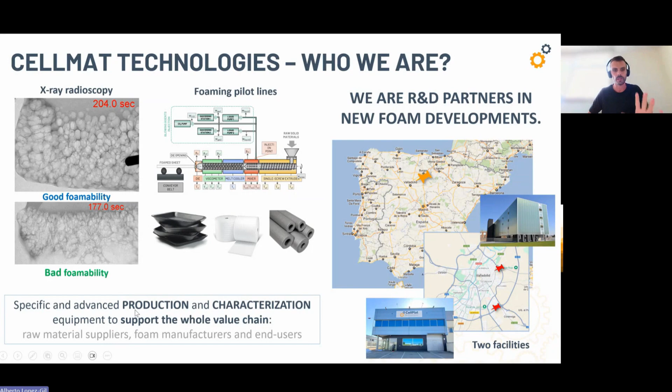What we do is basically support companies in the foam market to develop more sustainable products and more advanced products. We help companies in the whole value chain: raw material suppliers, foam manufacturers, and end users of the foams. And why foams? On the one hand, because they are very interesting materials from a scientific perspective, as you can see here in this X-ray tomography reconstruction of the cellular structure. This is also equipment we have to understand the cellular structure of foams.

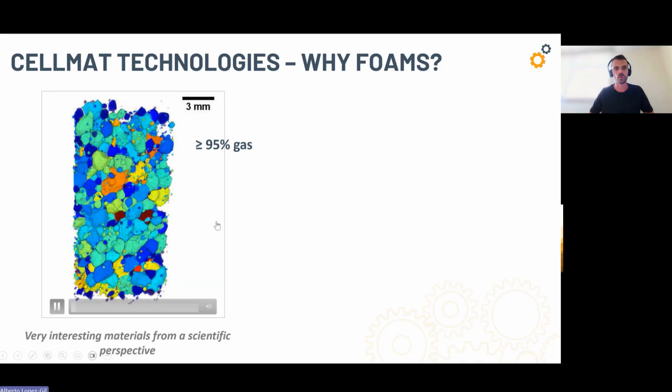Foams are very complex materials. They are two-phase materials: there is a polymer and there is a gas. In low-density foams, which are most of the foams in the market, more than 95% of the material is gas, and the gas phase is arranged into a very complex cellular structure, which is not easy to analyze. We have tools to analyze this with accuracy, and this is important for the physical properties of the foams.

On the other hand, they are strategic materials in many sectors and applications, depending on the structure. If it is a closed cellular structure, we can use them in buildings for thermal insulation, for instance, in packaging, in food packaging, in sport products. For instance, the soles of running shoes are foams, as you can imagine. And if the cellular structure is open, interconnected, as in this example, they can be used as acoustic insulators, in comfort applications, mattresses, and car seats. The range of applications broadens when the cellular structure is open.

The foam market is huge. It is a rough number, but around 10% of the world plastic production is dedicated to the production of foams. If we consider the volume, given the density of these products, this represents 50% of the whole plastic market in volume.

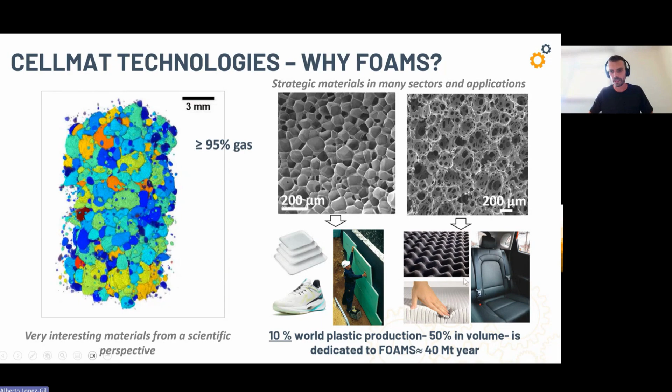However, these products, in many cases, are not circular, or they represent at least environmental challenges. Many of them are common to any plastic product. Most of the foams in the market are produced from fossil-based polymer, for instance, polystyrene foams, polyurethane foams. This is clear. Secondly, the recycling of these materials is not easy in many cases because of the high gas content. It's not easy to get rid of the gas for recycling.

In addition, most foams are cross-linked. They need to be cross-linked to achieve low density. So in the end, they are thermosets, difficult to recycle. The volume is very high, as I said before. So they occupy large spaces in landfills when they are finally discarded. This is an example of what you can see in this picture.

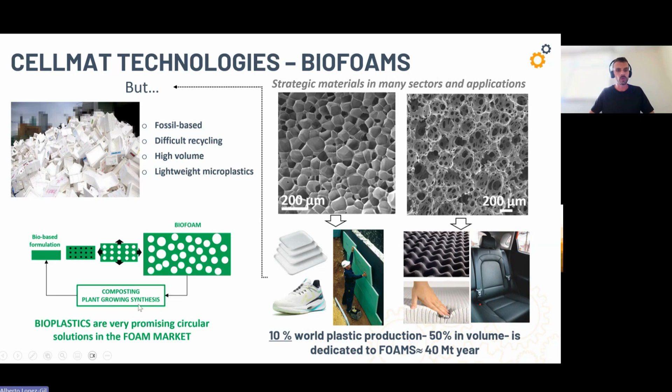And concretely, associated to expanded polystyrene, for instance, they release lightweight microplastics that can be accidentally dispersed in the environment. And this is also a huge concern, specifically linked to foams. This is why we believe in CELLMAT and, in general terms, that bioplastics are very promising circular solutions in the foam market. However, there are some drawbacks that are avoiding so far the penetration in the foam market of biopolymer

and bio-based formulations. Here you can see some of them: moisture sensitive. They are moisture sensitive, and this is not possible in certain products. The thermal resistance is lower. The performance at the same foam density is usually lower with some biopolymers. And in general terms, they need modification to improve foamability. And this is because there are not yet many grades specifically developed for foaming. And foaming a polymer needs to withstand very stringent requirements.

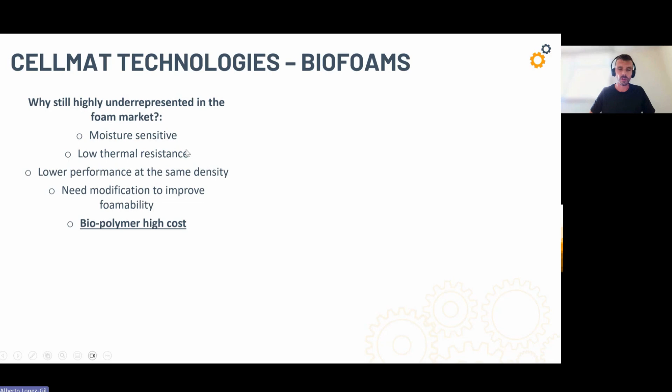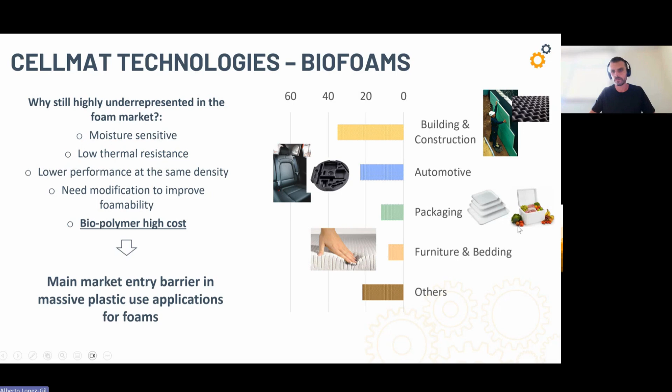But finally, and this is common to most applications of foams, the cost of the biopolymer is very high, and the foam market is dominated by commodity polymers, as I said before, by polystyrene, for instance. And this is so far the main market entry barrier in massive plastic use applications for foams. Here you can see how the foam market is divided by sectors. Most foams are used in the building sector, as I said before, for thermal insulation, acoustic insulation, automotive, expanded polypropylene, polyurethane foams, packaging, mainly dominated by polystyrene foams, but also furniture and bedding.

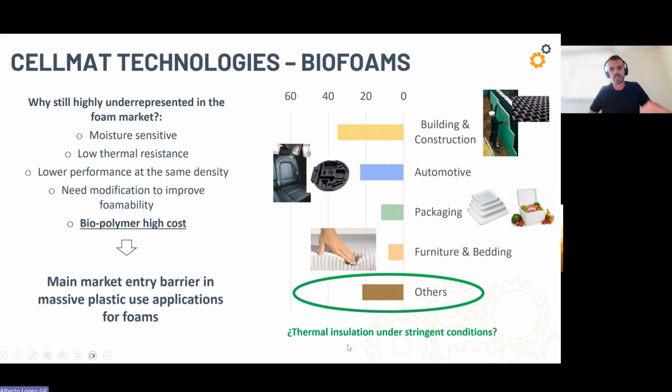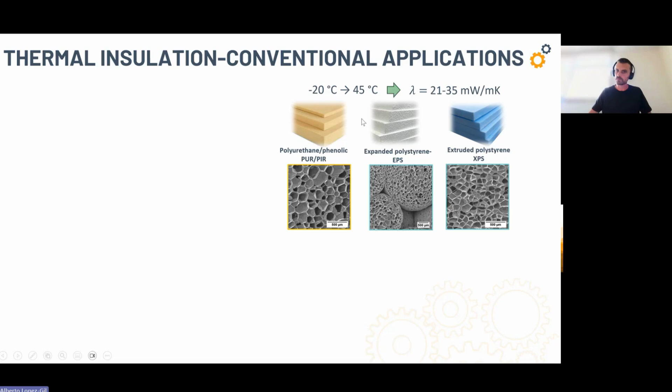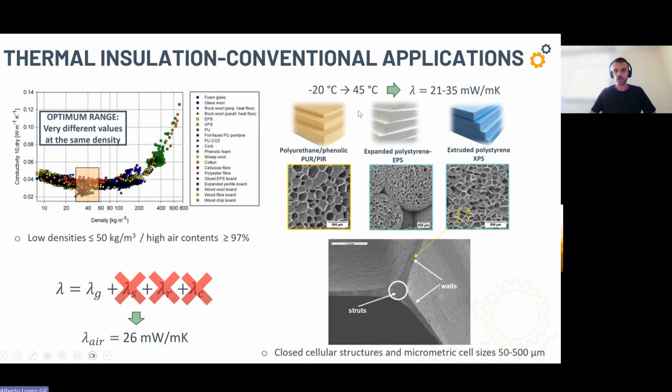And moreover, these materials are designed to be closed cell and to have cell sizes within this range, 50, 500 microns. And by doing this, we can also suppress the radiation term and the convective term. So in the end, we have basically the thermal conductivity of the gas, which in this case is air. We have foams that are very good for thermal insulation under normal or conventional climate conditions, I would say. However, there are some applications for thermal insulation in which the conditions are more stringent, and this is the case of the refrigerated transport of vaccines.

So these are very stringent conditions for the thermal insulation material. And moreover, the transportation time is very long. We need to keep the product at very low temperatures during the whole process of transportation until the health care facility. And finally, this is also important, the space for thermal insulation in these packages where the vaccines are stored during transportation is quite limited. We are talking about very low thicknesses to put our thermal insulation material inside.

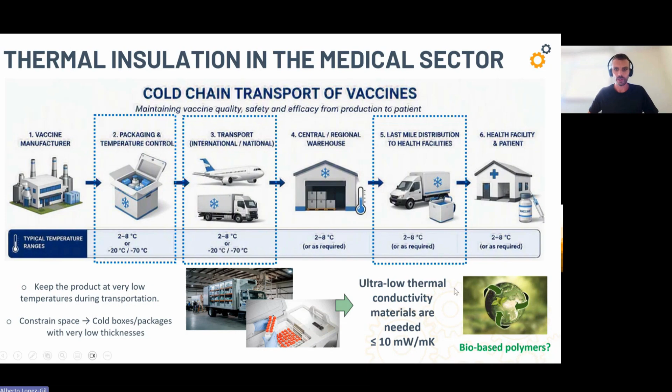And this is not the case in other applications for thermal insulation where we can play with the thickness to increase the thermal resistance. So it's clear that in this application concretely, and in general in the transportation of refrigerated products, generally vaccines, remedies, we need ultra-low thermal conductivity materials, allowing us to have lambdas below 10 milliwatts per meter Kelvin. So we believe in this case, the cost is not such a high requirement for the polymer or for the foam. So maybe this is an opportunity for bio-based polymers.

So what super insulating material can we use in this application? There are some possibilities in the state of the art. One of them is aerogels. We all know them. They are the lightest materials in the world and the materials with the lowest thermal conductivities, but they still face some issues. However, there is another material, the vacuum insulation panel, which is already being used and is already industrially produced for this application in which we need very low thermal conductivities.

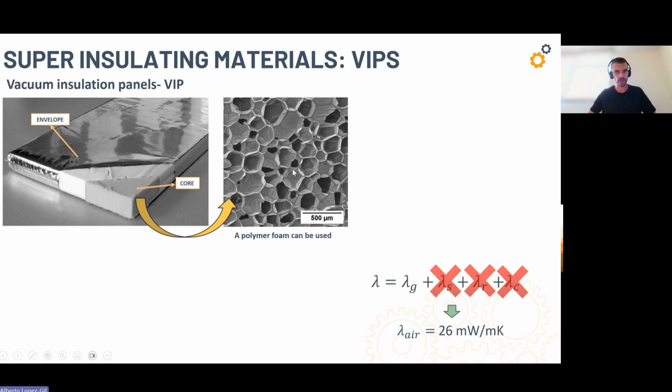This is in essence a vacuum insulation panel. It's a sandwich material in which we have a core and an aluminum layer on top. So in essence, we have a sandwich structure. And as a core of the vacuum insulation panel, we can have nanometric silica particles, which are compacted. This is a typical product in the core of the vacuum insulation panel, but we can also have a foam, which in this case is not a closed cell foam, as we said before for conventional thermal insulation application. This is an open cell foam because we need to evacuate the air, the gas inside the foam using vacuum.

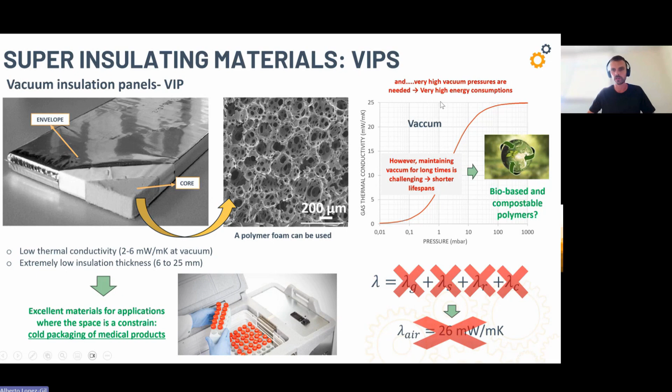With conventional foams with these cell sizes, the energy consumption in the production of the vacuum insulation panel is very high, so the final product cost is also very high. How can we reduce the vacuum needed to remove the air inside the foam? One of the best strategies is to reduce the cell size to the nanoscale.

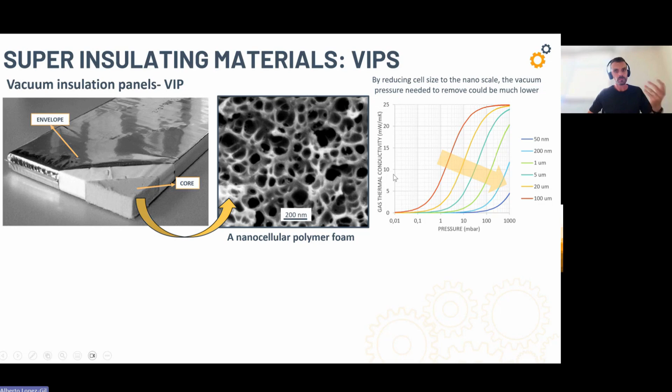By doing this, as you can see here in this graph, where we see the gas thermal conductivity and the vacuum pressure, by reducing the cell size from 100 microns to 50 nanometers, which is this line, we can reduce enormously the vacuum needed. So now the energy required to produce the vacuum insulation panel is lower. And this is something we have already done.

We have been able to produce nanocellular polymer foams that are very promising for this application. The cell size is below 200 nanometers. So what you see is like a solid panel, and you don't perceive this material as a foam. But if you look at the micrograph, at the microstructure inside, you see that this is a foam.

This is a technology that we have developed. The thing is that we need very specific technology. We need supercritical foaming using very high pressure, long foaming times, and polymers specifically developed to uptake large amounts of carbon dioxide, such as PMMA. So the question is, is this possible? Can we produce this nanocellular foam, with open cellular structure, by using low pressures and foaming times?

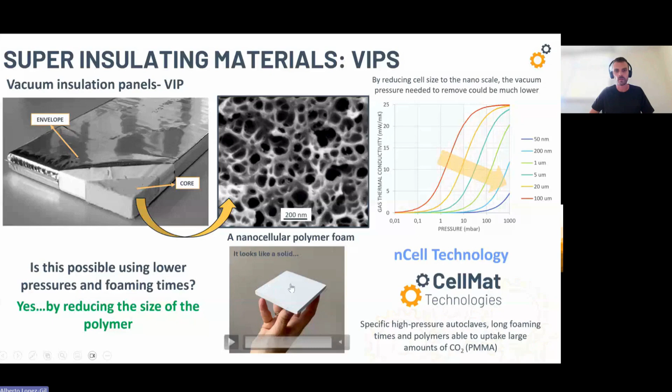Yes, this is possible by reducing the size of the initial polymer we want to foam. And this is possible by using the bead foaming technology. This is a technology in which, instead of foaming solid sheets, large in size, with a prismatic shape, for instance, we are foaming tiny micropellets, lower than 1 millimeter in size. This is the initial polymer. This is the vessel, which in this case is a stirred vessel.

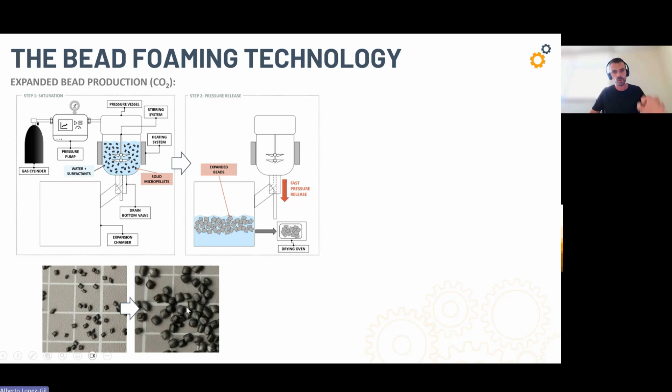So the micropellets are suspended in water, and then the blowing agent, carbon dioxide, is injected, and the gas is diffusing into the micropellets. And when the micropellets are fully saturated with gas, then we open a valve, and the micropellets expand into expanded beads, as you can see here, also very small in size. And finally, we need a thermoforming process to obtain a prototype. This is a very small prototype obtained in our facility.

But this process is already used to produce real products, such as expanded polypropylene, for instance, used in the helmets of bicycles or in many car parts, for instance, in the boot of the cars. And we have a wide range of autoclaves, of high pressure vessels, stirred vessels for the bead foaming technology in our facility, with very different volumes, from 0.3 up to 5 liters.

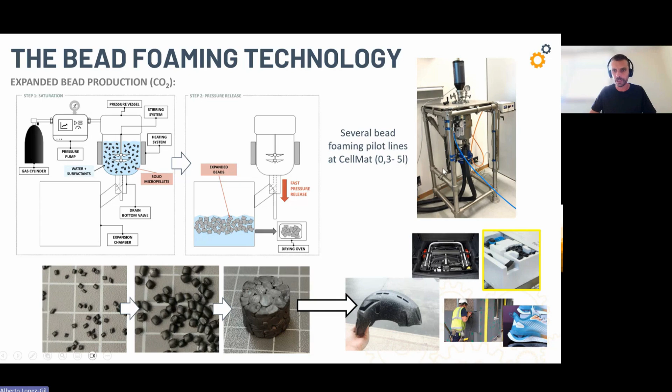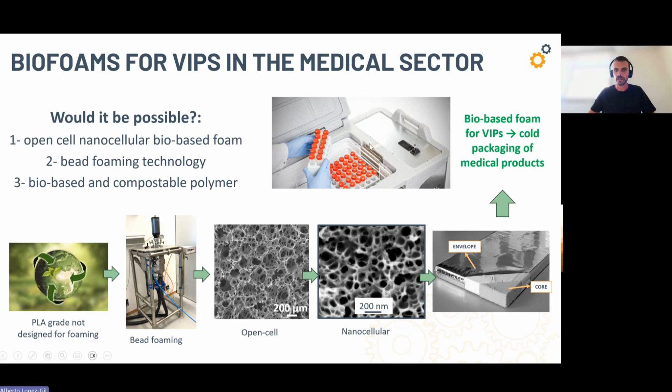The thing is, okay, we now know that we can reduce the time and the pressure to produce a foam using very tiny micropellets. But is it possible to produce a foam with an open cellular structure and a nanocellular structure, needed in an efficient vacuum insulation panel, using the bead foaming technology and using a biopolymer, in this case a PLA grade not designed for foaming? If we are able to fulfill all these requirements, we would have a very promising material for the core of a vacuum insulation panel, and then a very promising material for the refrigerated transport of vaccines, for instance.

So we needed to come up with several approaches to do this. If we wanted to have an open cellular structure using a conventional PLA grade, we came up with the idea of using bio-based particles, in this case micrometric particles, such as native starch. So this is our foam at high densities yet, and the particles, in this case native starch granules, embedded into the solid polymer. As you can see here, this is an SEM micrograph of the native starch. The size is very small.

If we have these particles in the walls of the foam, when the foam reaches very high expansions, if they are properly placed, maybe at very high expansion we can promote the breaking of the walls. This is the idea. So we have particles that are small initially, so that we don't promote the collapse of the foam. We allow the foam to grow without collapsing.

But then at the end, when the expansion is very high, these particles are able to break the cell walls, which in a very low density foam are very thin. The cell walls in a foam are around 1-2 microns in thickness. And this is what we do. We produce several blends of PLA with several contents of native starch particles.

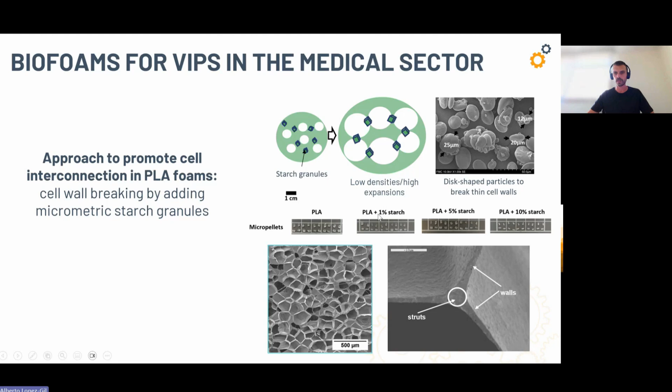As you can see here, these are the micro pellets before the foaming process. And then we also needed to have nanocells in our final foam. So the approach we use is to induce the formation of crystals during the foaming process so that we could increase the cell nucleation density in the process. And we did this by foaming at temperature below the melting temperature of the polymer.

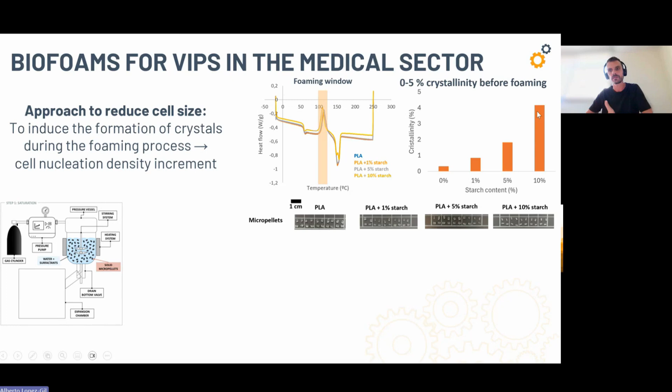This is the DSC of the different materials, different PLA grades we use. And this is the foaming window we use. You already see that we could increase crystallinity by having a starch in the formulation. But what we observe when we foam the different formulations with 3 different temperatures within this range, below the melting temperature of PLA, is that we were increasing the crystallinity of the PLA. And this is occurring at the moment when we open the valve and the polymer expands.

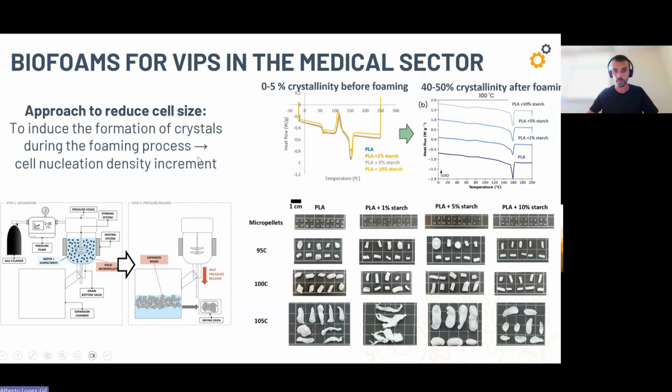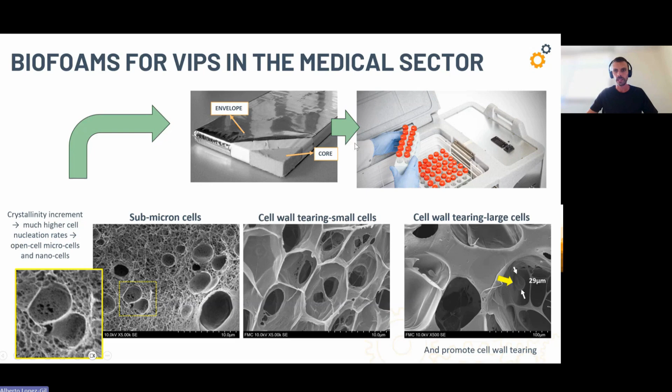So this is a very nice achievement, and we are proving that by using a conventional PLA grade, using different approaches based on formulation and using the right technology to produce the foam, we can have a very promising material to be used in a high added value application, in this case, the refrigerated transport of medical products. So, well, these are just to finalize the presentation.

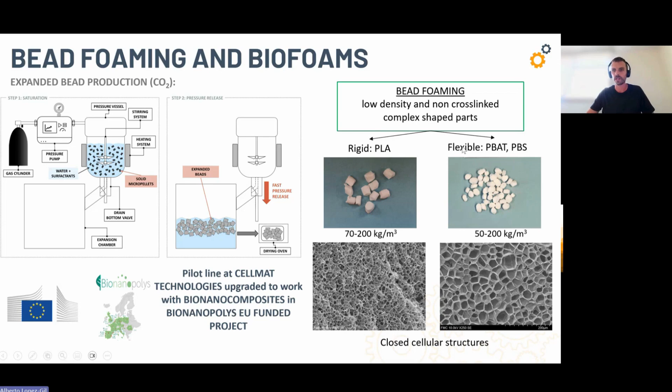This is the foaming pilot line. The bead foaming equipment we have has been upgraded in a previous European funded project, Bionanopolys. So this equipment is upgraded to work with several biopolymers and even nano-based composites. So this is the target in this project, to work with bio-based nanocomposites. And we have been able to produce foams by bead foaming using different biopolymers and with different cellular structures and cell sizes. Here you see some examples: rigid PLA with closed cellular structure within this density range, and flexible foams with closed cellular structures within this density range.

And we have more foaming pilot lines based on physical foaming, which are very promising for the development of bio-based foams, because we don't use chemical blowing agents. We just use a physical foaming agent, which is not present in the polymer after the foaming process. And all these physical foaming pilot lines have been upgraded to work with bio-based formulations and biopolymers: gas dissolution foaming, supercritical foaming, bead foaming, the one we have been talking about, extrusion foaming as well. We have 2 lines now, and also foam injection molding.

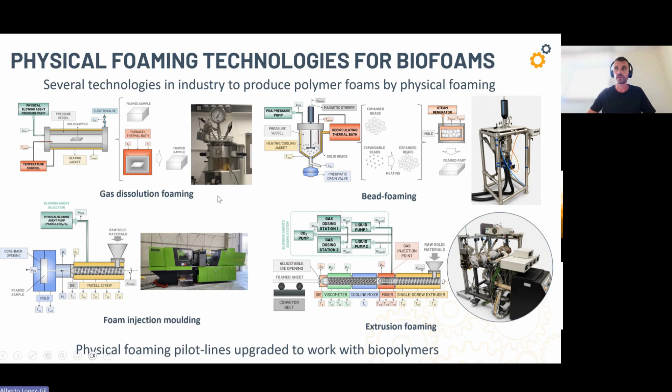And we will be very happy to use these lines to develop, or I would say in general terms, to accelerate the deployment in the market of biopolymers in the foam market, which is our ambition. So we are working a lot to have more biopolymers, more biofoams in the market, because this is something we know is being pursued by many end users of these products.